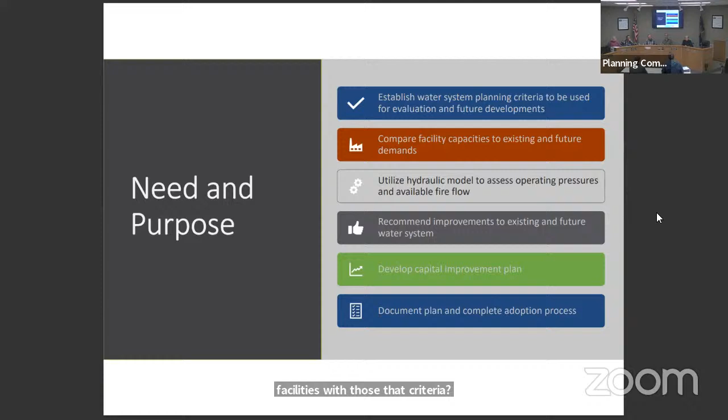Moving to the first slide. This is similar to the slide we had with the stormwater and wastewater master plans, but the need and purpose here is really looking at what the planning criteria are for the water system: how we want to evaluate it, comparing existing facilities with that criteria, and evaluating how it will look with future demands as the city and demands on the system grow.

We document all of that in the report you've seen. This slide shows population projections, and the growth is similar, if not the same, as the wastewater and stormwater master plans. That's intentional, so we're being consistent with where that growth is estimated to occur. With any good plan, that will adjust and change over time, but that's the snapshot in time.

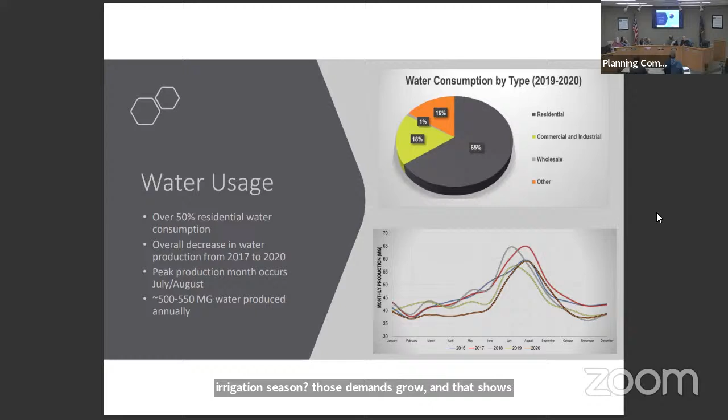This slide on water usage documents the types of users - wholesale, commercial, industrial, residential - those main user groups, and how much of the total volume of water delivered through the system each uses. The chart on the bottom shows demands throughout the year. It's typical for most systems that during summertime irrigation season demands grow, and that's shown for 5 different years, 2016 through 2020, and what those demands looked like for each month.

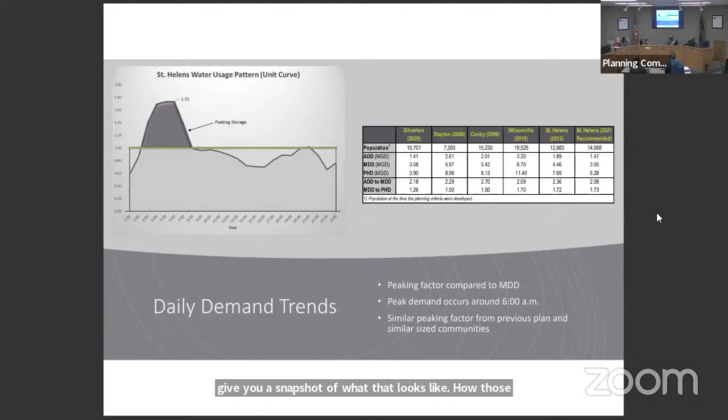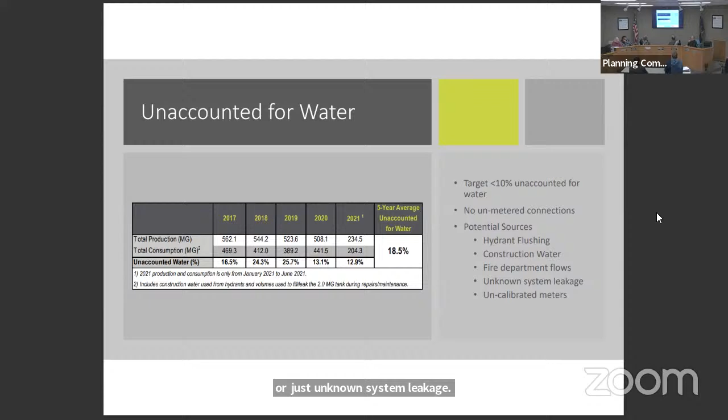I know city staff, engineering and operations staff have been replacing water meters throughout the system, so I feel confident they're heading in a good direction as far as mitigating unaccounted-for water.

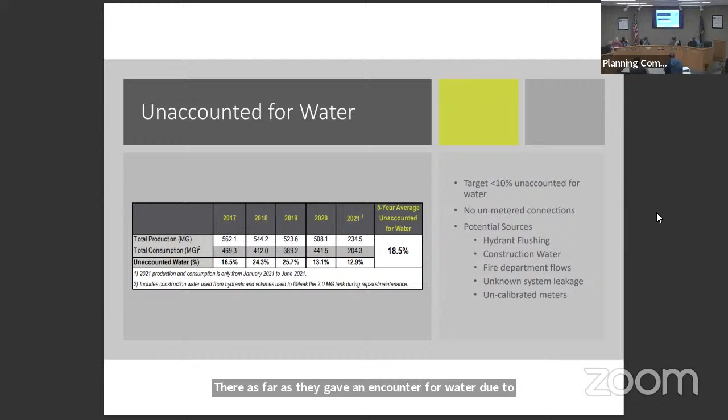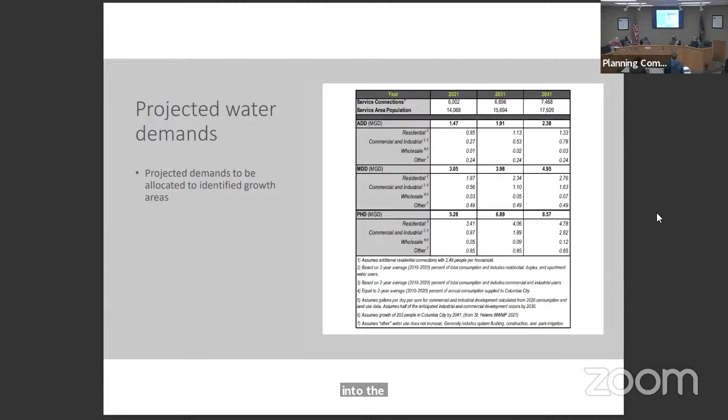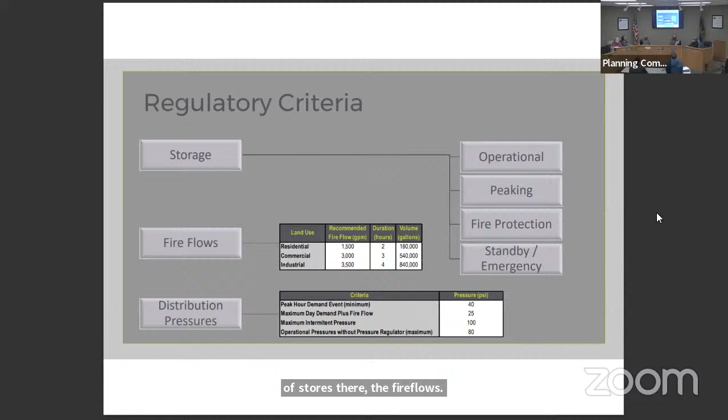Our regulatory criteria used to analyze and evaluate the system's storage shows the operational peaking, fire protection, and standby emergency storage that make up the total volume of storage recommended to be provided by the system. There are different nuances for each of the four types of storage. Fire flows are depicted for residential, commercial, and, as with most systems, industrial fire flow recommendation of 3,500 gallons per minute for 4 hours, which dictates the amount of fire protection storage you'd want to provide.

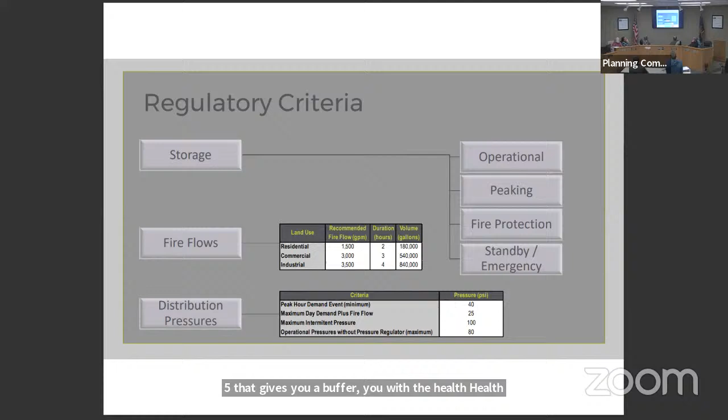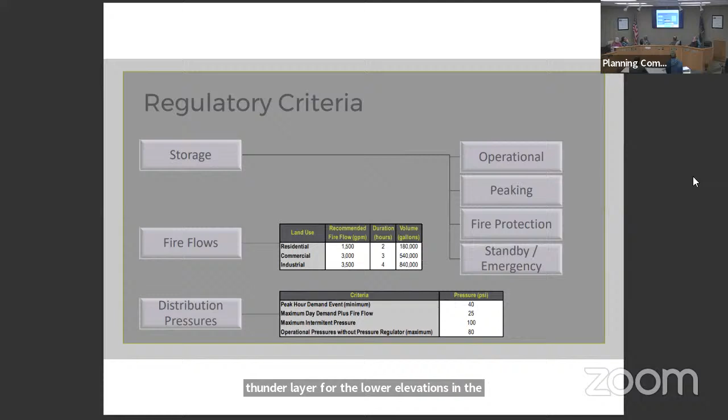We coordinate and collaborate on that with the fire department. Distribution pressures reflect the minimum - we don't want pressures lower than 40 psi, with fire flow not lower than 25, which gives you a buffer with the health code. Maximum pressures are 100 for intermittent pressures and 80 typical - and that's something I'll steal a little thunder on later. For the lower elevations in the city, there are normally higher pressures throughout the system.

So the water filtration facility, in looking at the existing conditions, it's as you'd expect with a newer facility. It's in good condition. What you're seeing is normal replacement of short-term assets. The filters need to be replaced on a regular schedule, and you're coming up on that time frame. City staff are planning for and looking at that replacement schedule, so they're doing what they should be doing. Overall, the filter facility is in good condition and meets future criteria and demands.

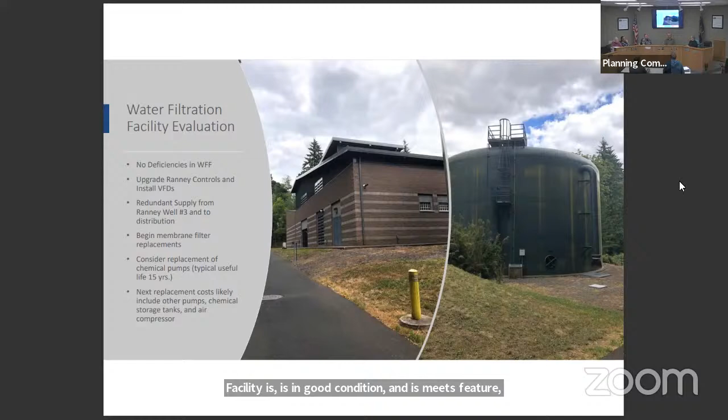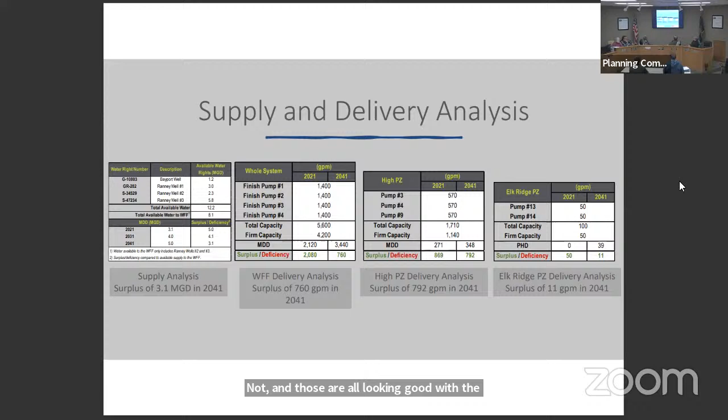Now that the criteria have been established for existing and future demands, we looked at what we call supply and delivery analysis. Supply looks at your available water rights compared to existing and future water demands. The table shows there's a surplus of about 3 million gallons per day. We also did the delivery analysis, which is the pumping capacity of each facility — system-wide at the filtration facility, and also the high pressure zone and the higher Elk Ridge pressure zone. Those all look good with existing and future demands. There's no deficit, no need to install bigger pumps, so that looks good.

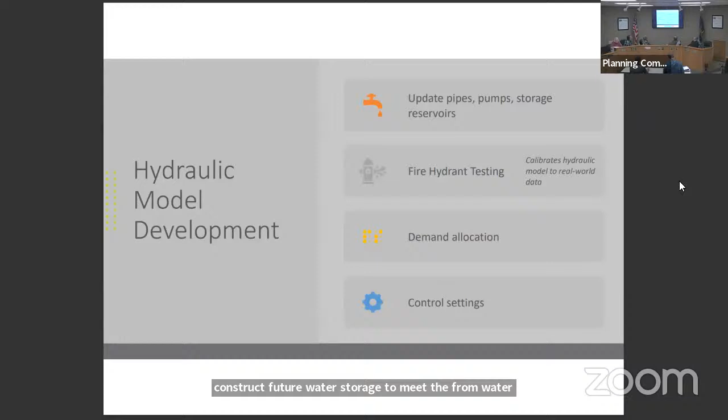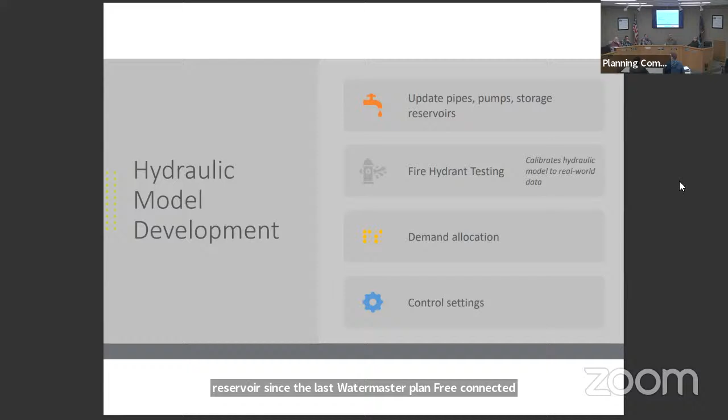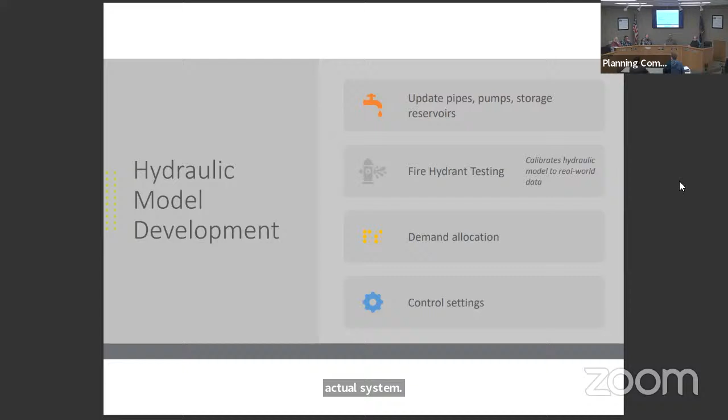As Peter mentioned, we developed a hydraulic model. This lets us look at pressures throughout the system and what each pumping facility is doing. Development of this model included updating all the pipes, pumps, and storage reservoirs since the last water master plan. We conducted fire hydrant testing in summer 2021, getting real data points from the actual water system that we input into the model, so we can compare and make sure the model produces results representative of the actual system. We allocated the water demands and assigned the reported control settings. Then we used the hydraulic model to look at different scenarios.

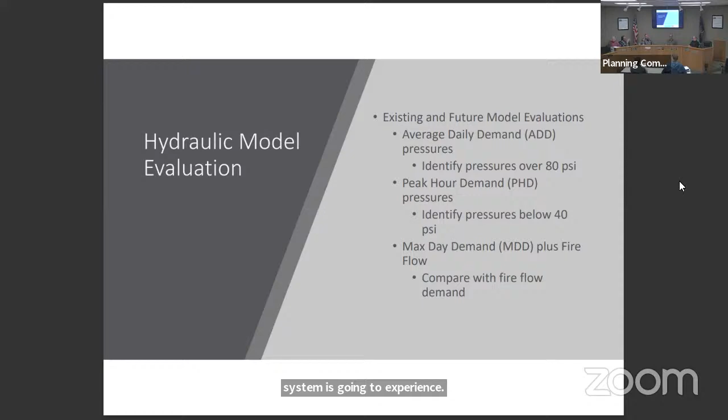Next slide. Looking at some model results, this is system-wide average day demand. The blue dots toward the river indicate pressures over 80 PSI, with a couple black dots over 100 PSI. Same thing on the west side of the city — in the high pressure zone, there's over 80 PSI.

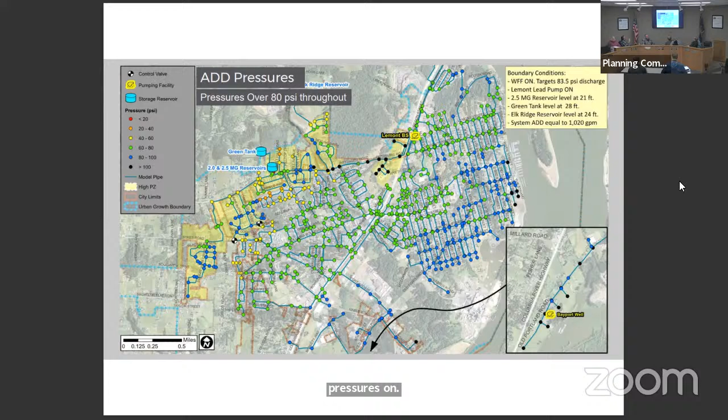Then we looked at peak hour demand. Next slide. Here we were looking for pressures below 40 PSI — not too many, a couple in the main pressure zone, and then up north above Pittsburgh Road. So we looked at improvement projects to correct these lower pressures, noted in the capital improvement plan.

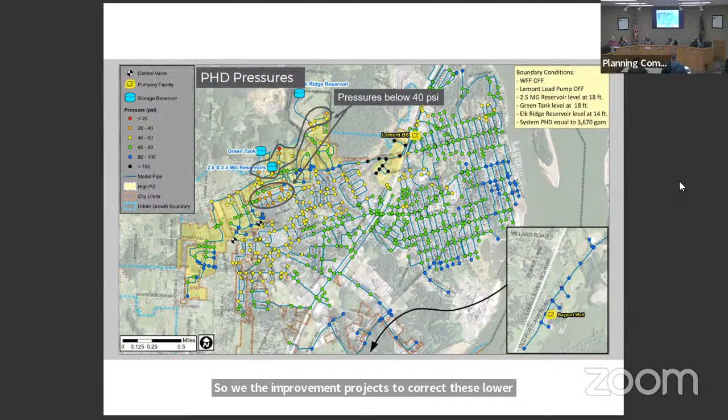This is existing water demands, maximum day plus fire flow. It's a busy figure, but green shows residentially zoned areas, red is commercial, and purple is industrial. The red dots show where fire flow demands are not being met, where improvements are needed to meet the fire flow established for residential, commercial, or industrial areas.

This is typical for municipal water systems. The max day demand plus fire flow is the demand scenario that is hardest to meet, because you have your max day demand and a fire flow which is quite significant for most systems—you're looking at 3,500 in the industrial area. So this is kind of your worst case scenario, as those fire flow demands dictate most improvements for systems. There are low pressure areas, but some of those also coincide typically with the lack of fire flow capacity.

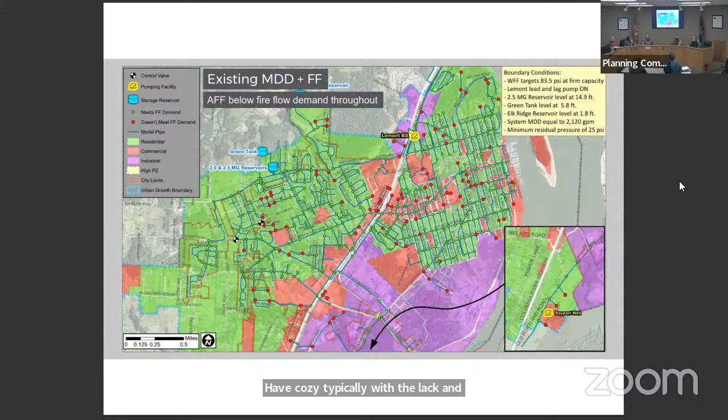This is looking at the future water demands, and we've put in pipelines where the anticipated growth is. This identifies where development needs existing system improvements in order to meet fire flow demand. The future pipes are shown in black, and the red dots are the same, not meeting fire flow. This indicates there are quite a few developments that would need improvements to the existing water system if they were to connect and meet the available fire flow requirements.

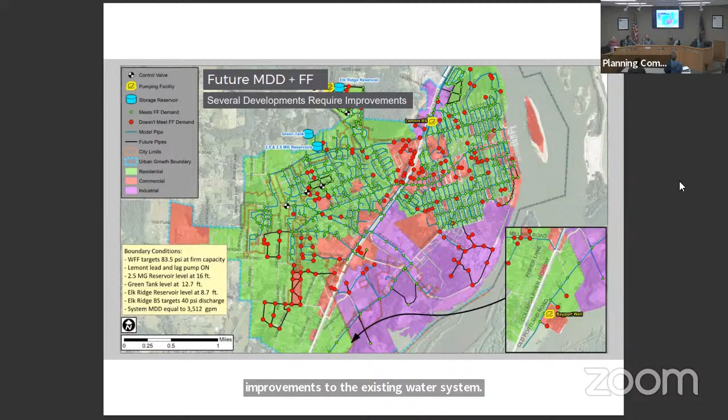Now that we've looked at pretty much all the components in the evaluation, we start looking at improvements to correct these deficiencies. We looked at alternatives for the bigger picture items. The only one we'll highlight here in the PowerPoint is the storage alternatives.

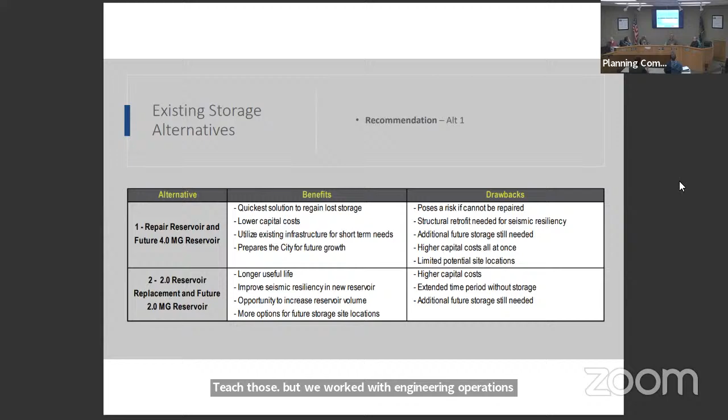This is looking to correct the existing storage deficit with the 2 million gallon reservoir offline. Alternative one would be to repair the existing reservoir and then install a future 4 million gallon reservoir to meet that future storage deficit. Alternative two would be to demolish and replace the existing 2 million gallon reservoir in place and then install a future smaller 2 million gallon reservoir. There are benefits and drawbacks to each. I won't walk through each of those, but we worked with engineering and operations and came up with the recommendation of alternative one for correcting the storage deficit.

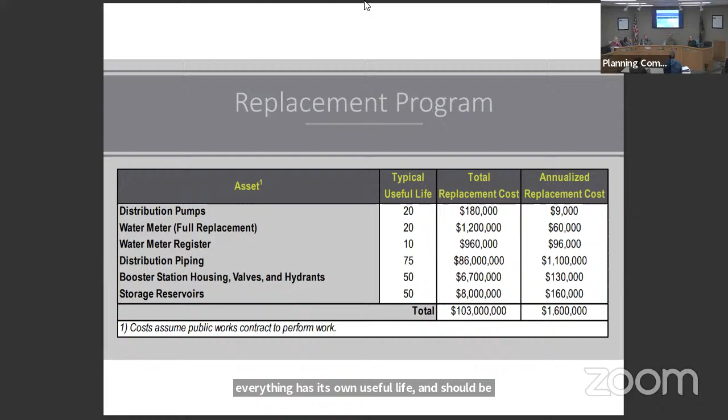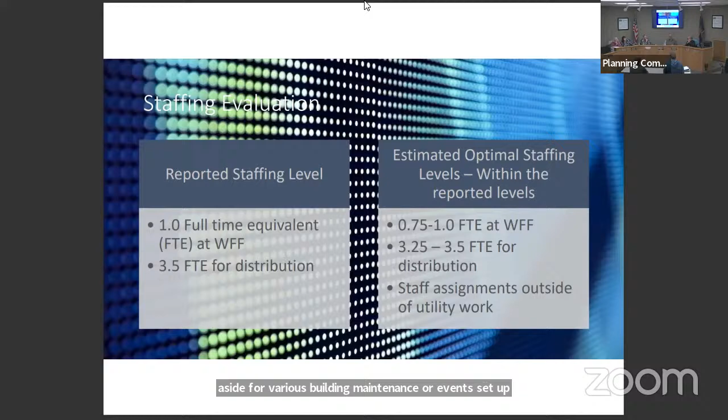The capital improvement plan is a summary of all the recommended projects and solutions to address the deficiencies. We have priority 1, 2, and 3, which include the capital improvement plans for that 20-year time frame. We've also broken out priority 4 for this master plan, which covers projects that are developer driven. They're in an area that doesn't serve any existing customers, and will only be needed if there's new development.

That could happen anytime, right? If you have the crystal ball for when the property owners or whoever is going to develop... that's why we don't put that into a priority 1, 2, or 3 specific time frame.

Priority 5 is the 20 to 50 year plan. It's planned for a 20-year planning time frame, but Oregon Health Authority's drinking water program now requires, as in other states, a seismic resiliency plan. That was a component of the evaluation and report you saw in the full report. Those look out past 20 years, all the way to 50. There are portions and recommendations associated with the backbone system that we'd recommend designating as the backbone system, and then planning improvements so it can be resilient to a seismic event. So priority 5 covers those items not already covered in priority 1, 2, or 3.

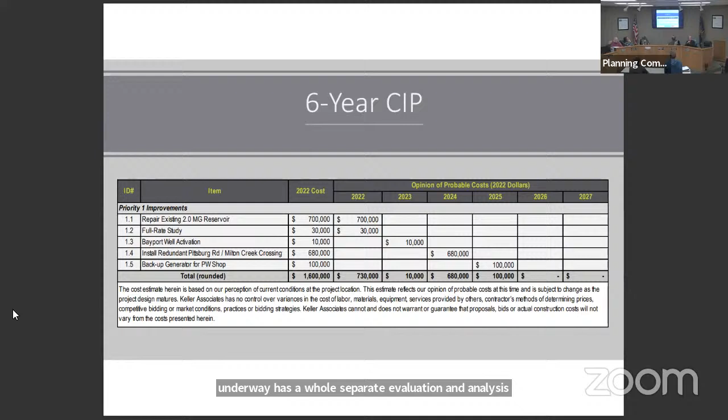Next, for the 6-year capital improvement plan, they asked us to look at those priority 1 improvements and allocate them by year. You'll notice the repair of the existing 2 million gallon reservoir is a project already underway, with a whole separate evaluation and analysis that the engineering and public works group is looking at. That wasn't part of our specific scope, but we wanted to make sure it's in the capital improvement plan so it's properly allocated and budgeted for.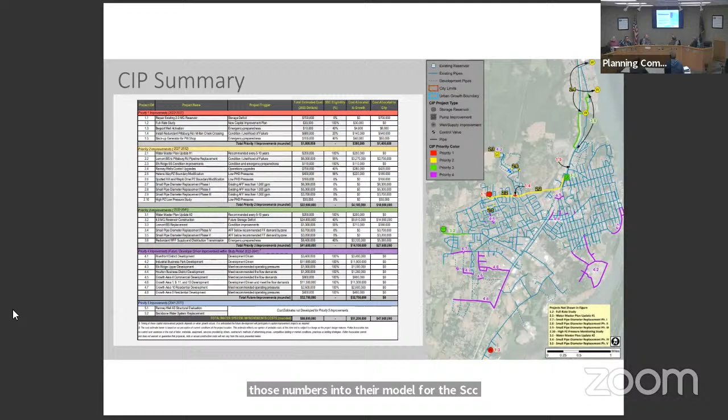The other component, besides the seismic resiliency plan, that was incorporated and recommended, is the water management and conservation plan that the Oregon Water Resources Department requires of water systems. Because a lot of components intermingle, it's much more efficient and can be done quickly and simply with a small amount of extra work to complete the water management and conservation plan.

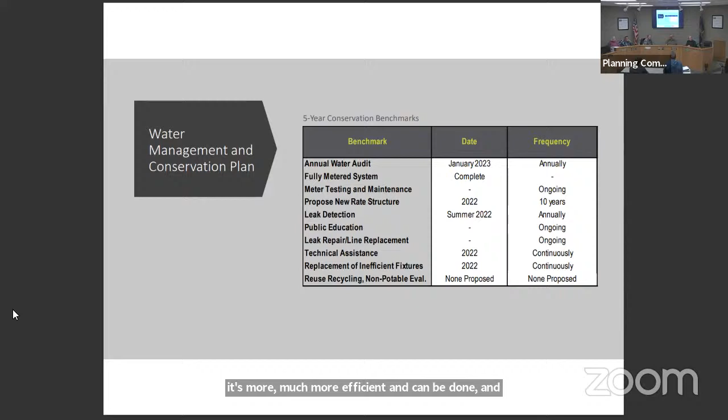One of the larger components of the water management and conservation plan is updating the water curtailment plan - in the event of a water shortage, what is the trigger, and what are the different stages? This is mostly based on the previous water management conservation plan, except we broke it into four stages: mild, moderate, critical, and emergency. We'll go through each of those. The first stage is mild - this is if a water shortage may exist, and the goal would be to reduce water usage by 5%.

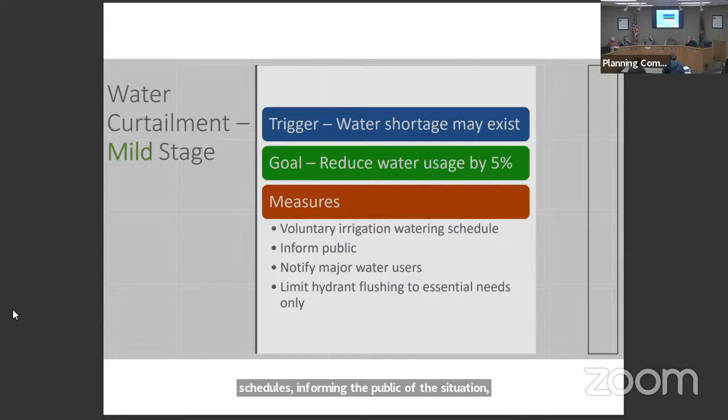And this would be done by voluntary irrigation watering schedules, informing the public of the situation, notifying the major water users, and also limiting hydrant flushing activities. The next stage would be moderate.

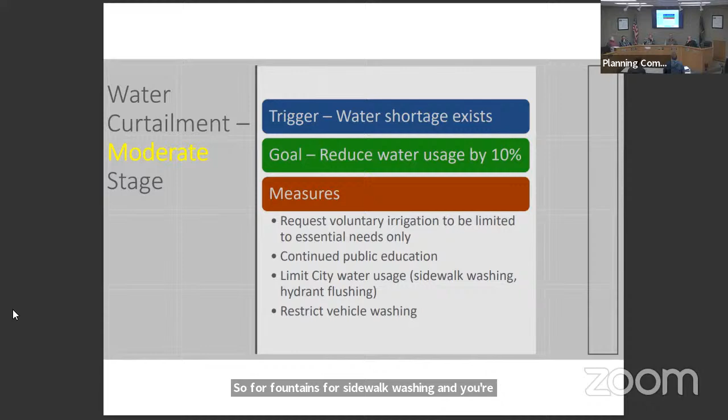The trigger is that a water shortage does exist. The goal would be to reduce by 10%, done by continuing irrigation schedules, continuing to inform the public, limiting city water usage for fountains, sidewalk washing, hydrant flushing, and also restricting vehicle washing. Next stage is critical.

This is when there's a threat to the water supply that may reduce the amount of water that can be supplied to the city. The goal would be to reduce by 25%. It's done by limiting swimming pools, hydrant flushing for emergency only, and also restricting park irrigation.

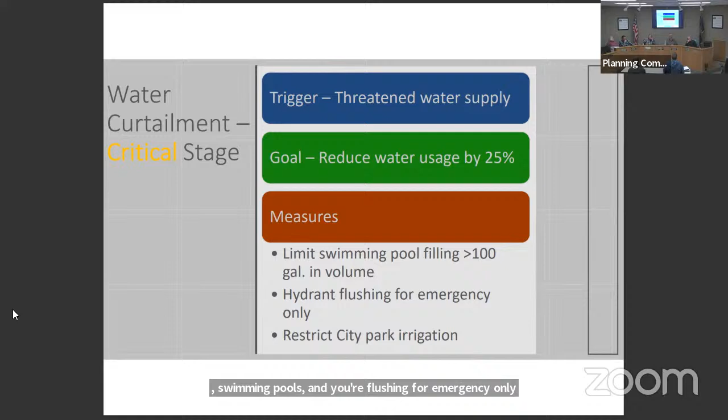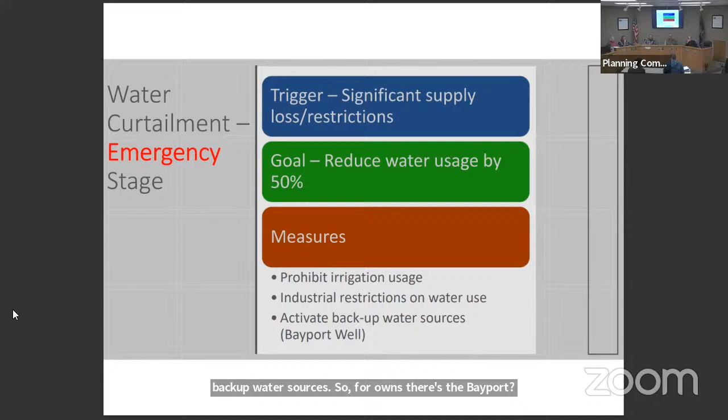And the last stage would be emergency. This is when there's significant supply loss and we can't meet the water demand. The target would be to reduce water usage by 50%. This is done by prohibiting irrigation, notifying industrial users and restricting water usage, and also activating any backup water sources. So for instance, there's the Bayport well, which isn't used day to day, but could be activated as an emergency supplemental water source.

And that brings us to the end of our presentation. So we'll open it up for any questions or comments.

The Bayport well only runs in an emergency situation? That's the way it's operated. It has odor issues, so it's shut down now, but we can use it in an emergency. We have to issue a boil water notice if, or when, it's been put on.

Yeah, there's a lot of complaints about it. Does the city's water come from the Columbia? All of it, yeah, all of it. The Bayport well - all of the city's current water comes from the Ranney collector wells.

Morton had said at a council meeting that the city had rights to something in the strip property. Oh, there is - we talked about this, this actually came up during the city council presentation as well. There is a water right there, but it's not used for the potable water system for the city.

Okay, so I'm just curious about whether that's a viable alternative to look at for potential increased supply or potential emergency use. I don't know what the budget would be on that, but if we have the ability of getting that kind of volume, if needed, yes, it is a possibility. It would take a significant investment in infrastructure to get to that point.

I noticed on the graph that was one of the low pressure areas. So number one, we have enough water, we can build 400 units, condos and things like that there, and we're going to be able to have fire capacity in that area too. So that area has a high pressure area of that main zone. That's growth area 2 from the first couple slides, so it is accounted for in the master plan. The capital improvement plan does account for that allocated demand, that near future demand, hopefully.

So enough water pressure and enough water for condo developments. I think there's a 55-foot limit, we could build 5-story condos or whatever, and there's going to be enough water pressure and water fire suppression capability. There is in the capital improvement plan, with that development, a development-driven improvement to the existing system. I think you saw some of the red dots - yes, there's a couple existing pipes that need to be upsized in order to meet the fire flow demand. That's project 4.1 in the capital improvement plan, the Riverfront district development, so it's all the improvements needed specifically for that.

I had a couple other questions. So the Sykes, what was the idea? Why would we need the Sykes road? I guess you guys are leaning toward the Sykes road as an area for the storage.

So what we did, we looked at not just those 4 locations. It's kind of a cool analysis - Trenton's a whiz at GIS, and being able to look at that contour band, it needs to match what those existing reservoirs are at to be able to operate at the same system pressures and have good operation. There are other areas throughout town that have that, but when you're looking at a 4 million gallon reservoir, it doesn't fit - whether it's too close to a creek, river, there's lots of components we're looking at. Also developable - is it flat enough? Is it on a big hillside where we'd have to move a mountain in order to build it? So that one off of Sykes Road was the best solution we could see. The recommendation is when you first start to actually implement that reservoir project, you're going to do a much more detailed siting evaluation, looking at environmental components, property acquisition, drainage, overflow - a whole list of components we'd look at in a lot more detail. But from our master plan level, that looks to be the best location.

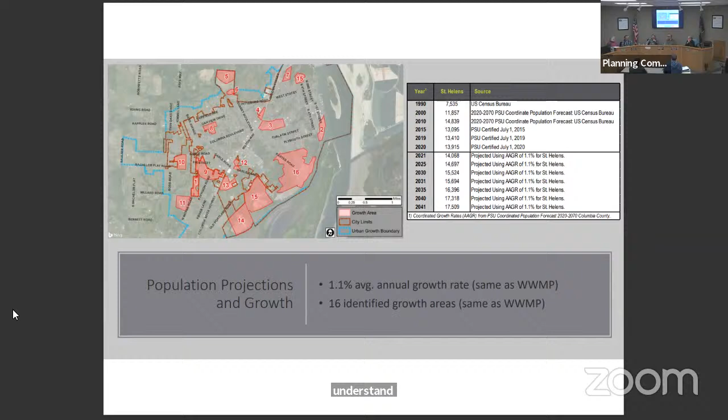Lots of questions? Thank you. Other questions? All right, thank you, appreciate your time.

It's now 7:51 p.m. The public hearing is now open. The quasi-judicial land use hearing - the subject of this hearing is a request for a variance. Subject property is identified on the county assessor's map as lot 1200 on map 1W4DA. The applicant is Nasia Vanilla. The owner is City of St. Helens. Because quasi-judicial proceedings require the observance of certain procedural formalities, we will take a few minutes to cover some preliminary matters required to be addressed. Any member of the commission wish to declare an ex parte conflict of interest or bias in this matter?

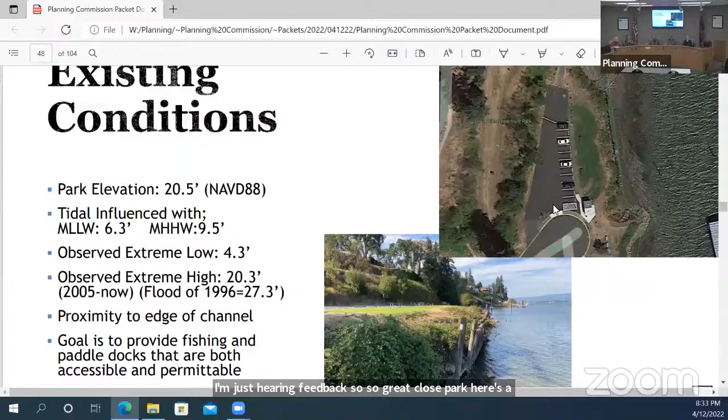So Gray Cliffs Park, here's a good aerial of the park itself. I wanted to point out a couple things. In 2019, we got an Oregon Parks and Rec grant to install this beautiful new restroom facility where my cursor is, and then we also paved and striped the parking lot.

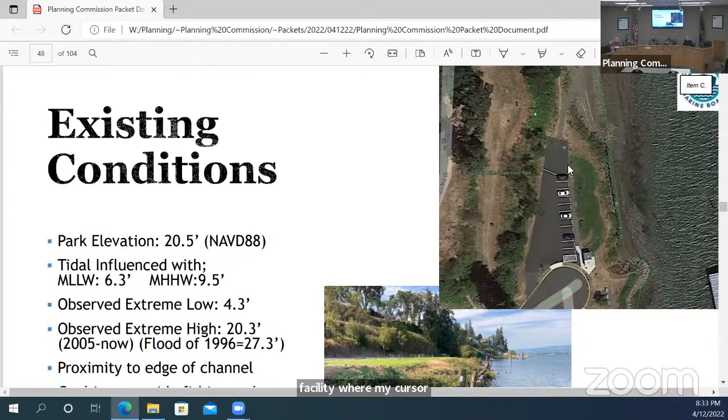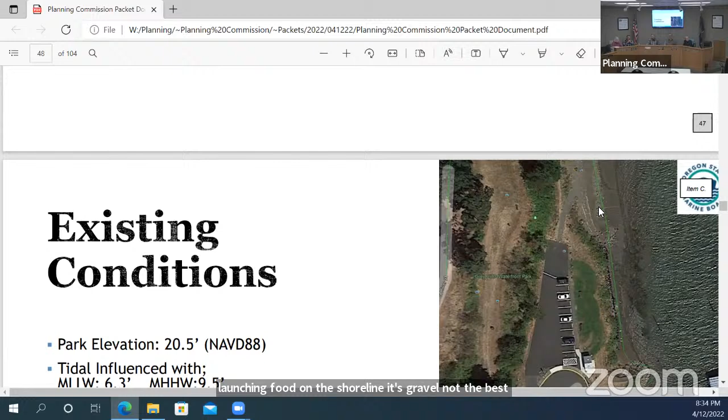This area here is a loading zone for bringing paddlecraft, launching on the shoreline. It's gravel, not the best way to launch, but some people do prefer it. Maybe one day it'll be sand. Maybe. Then you've been working on that for a while.

And here's kind of a shot looking up this bank here of the park. So a couple other things on here. The Marine Board did a survey and put a couple numbers up here. I just want to point out two of them.

MLLW is mean lower low water, that's at 6.3 feet in elevation. And then the other one is this extreme high, abnormally high, at 20.3, and then the flood of '96 was 27.3. So you can see the range of elevation that the river has, that this in-water facility has to work with. It's a pretty big range. So that'll impact the slope of the ramp, ADA accessibility—all the things that impacts quite a bit. So just keep that in mind.

And then here, it's just the goal—we talked about this—is to have a paddle dock, launch, and fishing pier that are both accessible and permittable. So that's the kind of goal of this project.

So I threw this in to show the proximity to the marina. Here's the parking lot in yellow. The area we're going to look for this facility is right where I'm drawing this circle. So you can kind of see the extent. It's not as far out as the marina, but it is pretty far out into the water, the facility we're looking at. And that's driven primarily due to permitting.

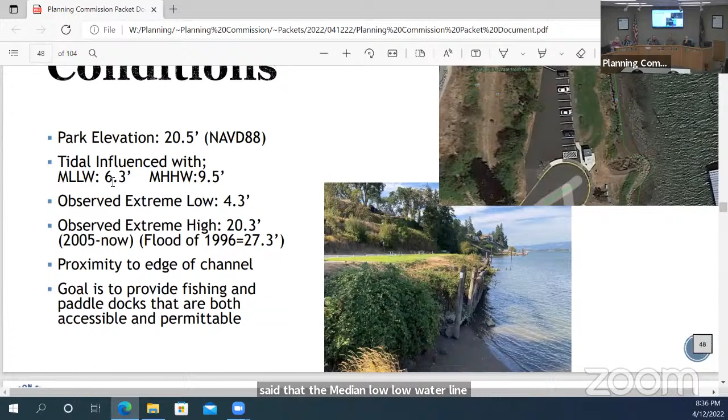The Marine Board said that the mean lower low water line, this number, they want to be 20 feet out further from that line of elevation to permit the facility. So you'll see that on the drawings. But yeah, it's all within here. They want at least 20 feet.

Where the facility would be, not necessarily horizontal distance extent, but depth. Yeah, you're right. That has to do with the National Marine Fisheries Service concern about shallow water habitat for the inshore fish—protecting that shallow water habitat.

So this slide—man, there's a lot of permits to get, and a lot of consultation with a lot of agencies for in-water facilities. This is basically the full Monty of permitting. And this is actually why they have a technical assistance program, because they do these facilities across the state. They know all the right people, they're the experts on this stuff.

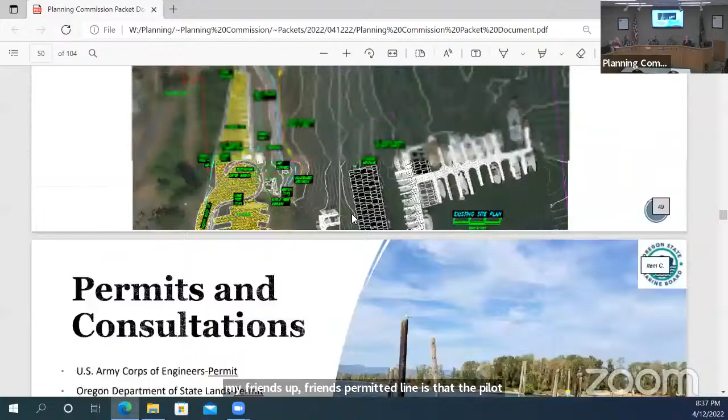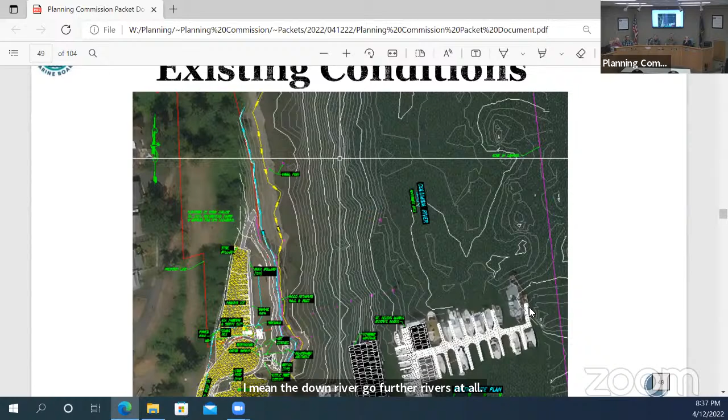Where's Brad's permitted line? Is that the piling or does he go beyond that? So these are the pilings, these pink dots. He's way beyond—you see the pink? No, but I mean downriver. Does he go further downriver at all with his lease? Oh, I'm not sure, I don't know what his lease is. He was talking about putting more docks in down there at one point in time, so I don't know. Do you mean does his lease extend in front of the park here?

Correct. No, we actually maintain a commercial moorage in this area with DSL now. Is that right? Yeah, okay. Not you, but other department. Yes.

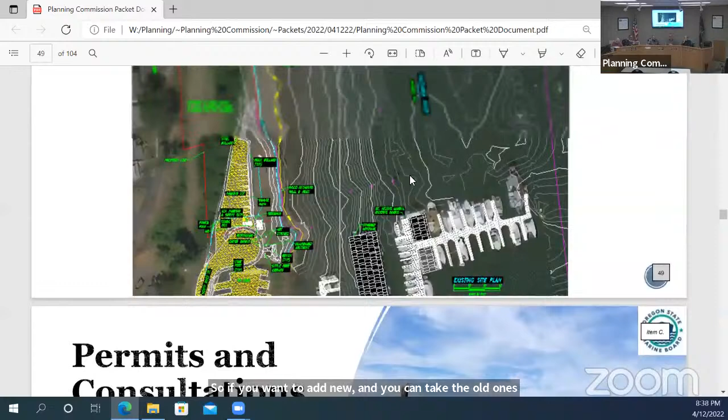I think John Walsh was thoughtful about not removing these pilings because you can use them as permittable mitigation—if you want to add new ones, you can take the old ones out and place the new ones easier. So these are actually really valuable pieces of mitigation for permitting. Likely would be pulled as a result of this project for mitigation.

And you'll see on the three concepts that are in here, some of them are pretty close to some of the designs, so we would have a priority to remove the ones that might impede the route of travel. Maybe some that are in the water most of the time that would be important to get up. But you can still use those as mitigation. You're counting on that, right? Jenny, if we're going to remove some of those pilings...

I just got that it's actually bird habitat. I've seen ospreys nesting on top of the pilings. Pretty sure these agencies would know that, that's the reason why they want to take them out, because they're predatory for endangered species. Yeah, so that's the one. They're beautiful to watch, anyway. So it's ecosystem versus what? A terrestrial person—it just provided more space for predators to pick off the things that can barely survive. Especially cormorants. Osprey aren't endangered. No, they are not.

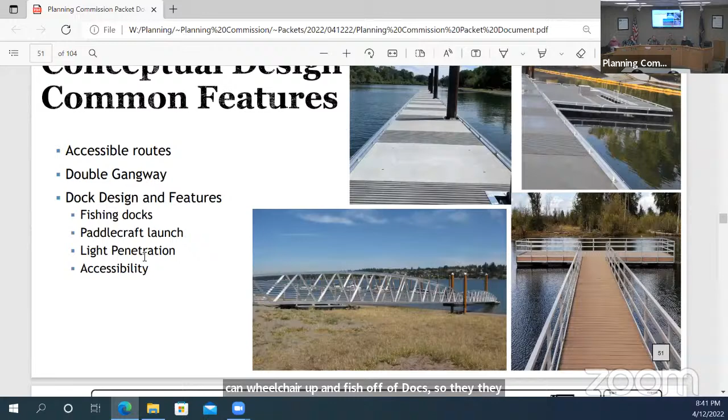There's fishing docks - this is an example of a fishing dock. We would lower the railing in some areas so you can wheelchair up and fish off of docks. They make ADA accessible railing for fishing off of. Another common feature is light penetration, so you notice the grating every so often that allows light to reach the water. This is for permitting purposes as well, and it's what Dan talked about. You've got endangered salmon, you don't want to create so much dark shadow that there's areas for predators to take out the salmon. Light penetrating decking is important for permitting purposes.

So I was hacked a little bit because I'm picking it apart a little bit. I was in a pre-application meeting with an improvement at the Sykes Bay Marina just last week, and we want to do a double 12-foot wide gangway down for access to paddlecraft, to be able to pass each other and so forth. Do you know how wide this gangway is? Well, I know it's at least 10 in the actual dock itself, but the gangway down I thought was 5. National Marine Fisheries Service had a real problem with that. Oh interesting, that it was 5, not 12?

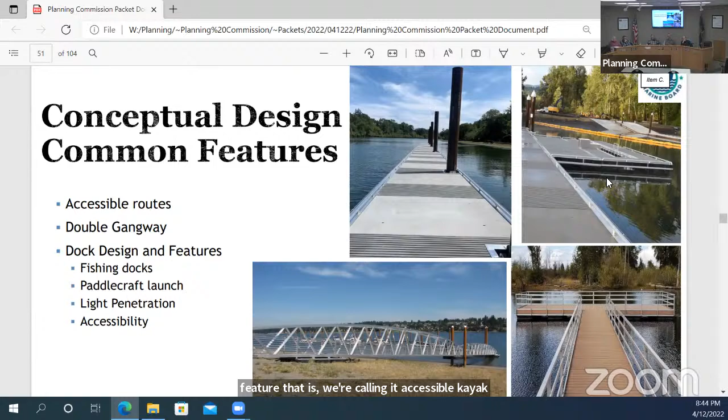Yeah, I'm sorry. So I just want to keep this picture in mind in the upper right - it's not the best picture of it, but there's a later picture. This is what the actual kayak launch looks like. I know you can't really see it very well, but this is the feature we're calling the accessible kayak launch ramp. There's a better photo I'll show you. The point of this image is not the upper area - there's better images that show that. The point of this is the side profile, showing the double gangway feature. The first portion is stationary, and then the second portion goes up and down with the elevation of the river. This virtually flat one would be when the river is at its highest, with virtually no slope to get to the dock facility.

When it's at its lowest in the summer, you're going to have a slope down to get to the facility and then the ground. Interesting thing about these, they're stationary most of the time, but for extreme flood events, they also float up. They did say the top of these is 6 feet higher than the flood of '96, so they wouldn't just float right off the top.

That was a question brought up in the stakeholder meeting. Well, during the '96 flood, they had to have tugboats go catch them as they floated over.

What else I wanted to point out on the side profile is that you can actually cut through. If you're launching out here and want to go around, you can swim underneath this secondary portion, so you don't have to go out into the channel area, the river portion. You can stay closer inland and get around by swimming and pushing your kayak under. I just wanted to point that out.

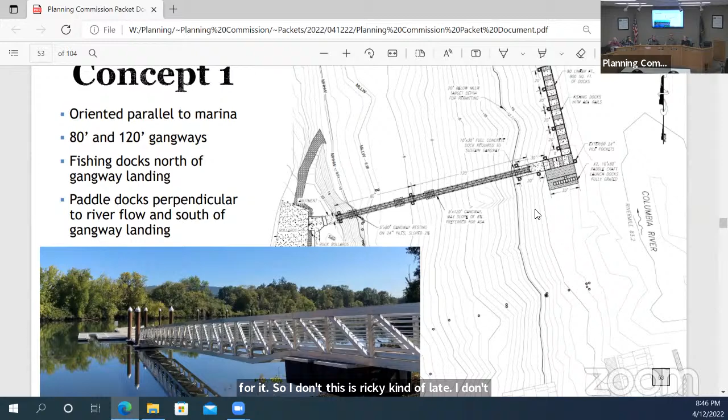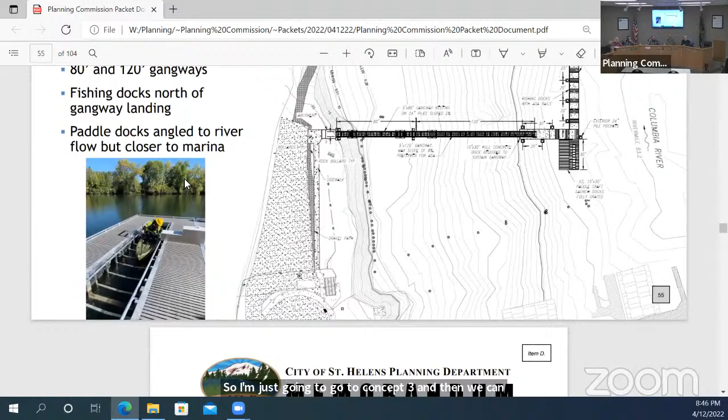Since we're already kind of late, I don't want to go through each one of these and critique every component. I just want to talk about the preferred alternative and why we ended up there. So I'm going to go to concept 3, and we can refer back to the others if we need to. This also has the best photo of the actual ramp facility itself.

You can see these bars that are submerged in water so you can ramp up onto them when entering or exiting the river. And then this metal thing slides out so you can roll up in your wheelchair and transition into the kayak a little more easily, because these slide in and out.

This facility is in Westport, Oregon. The Marine Board designed that facility, and it's been installed - you can actually go visit it. They just did a brand new boat dock, a whole big project in Westport. This was just one component of it, but the Marine Board's first test of this design was there, and it's working really well. So they want to implement another one here.

So let's talk about the concept. Here's the edge of the parking lot. The dock itself will come off in the loading zone area. This is currently the gravel area where shoreline launchers could still launch. This will not replace the shoreline launching, so if there's a preference, you can still launch there.

The first gangway is 80 feet long in this concept, and the second one is 120 feet long. So total you're at 200 feet in length, which is pretty long to carry your kayak. It's a trek, and that was talked about at the Parks and Rec Commission - what if we just shorten the ramp? Well, the shorter it is, the higher the slope. With this length, we can achieve an under 8% slope, which is a really good, achievable ADA accessible slope.

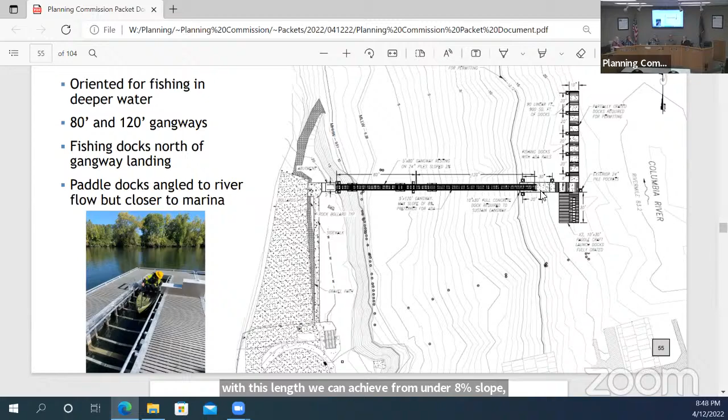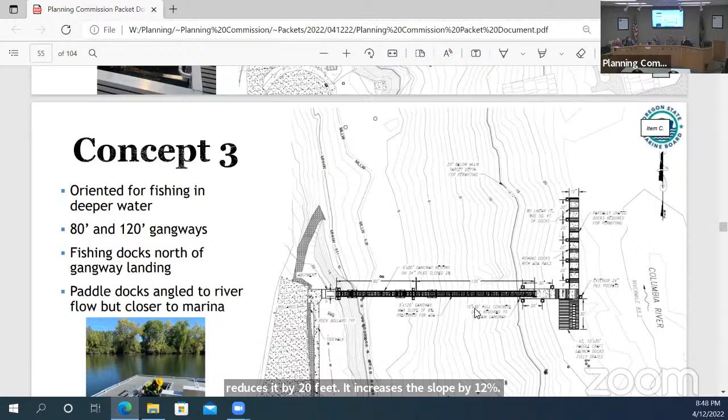The shorter you make it - one of these concepts has it at 100 feet total, reducing it by 20 feet - increases the slope to 12%, which is substantial. So I think the overall preference is to have the longer double gangway so the slope is less. That's the first component. But 12% still meets ADA for these types of facilities. The Marine Board has said they're trying to exceed ADA requirements because that slope is so steep, even just for families to get down while wheeling or hauling kayaks.

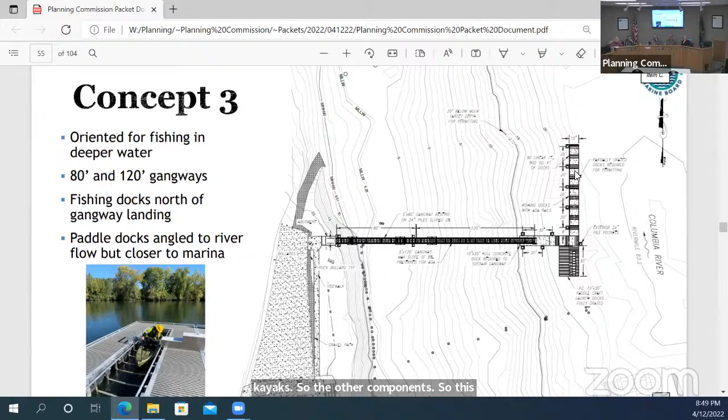So the other components - this is the fishing side, let me zoom in a bit. It has the pillars on the shore side of the launch, so you'd walk out here and fish off the side. Some of these concepts had the fishing side on the south side, and that was not the preference, just because of the way the water flows. You'd want your lines going northward, and you don't want them to conflict with the kayakers. So that's the fishing component.

And then this is the orientation of the ramp. This is what we spent a lot of the stakeholder meeting talking about - how we actually orient the ramp in relation to water flow and wind. And ultimately, this was the preference.

There was a tweak we made during that meeting, which is to flip this transition dock with the actual ramp. So this ramp would move here and the transition zone would move to the outside, which would help provide some wind break and current break when you're getting in and out of that ramp facility.

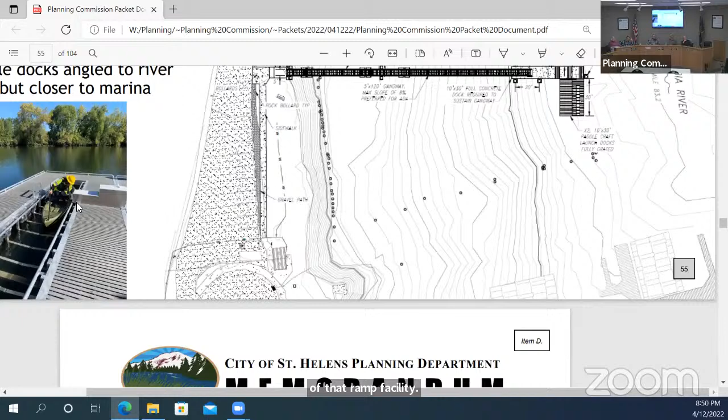This ramp is actually long enough to fit two kayaks, so if you have a family, you can have two people getting in and out at the same time. That was something the committee talked about and appreciated.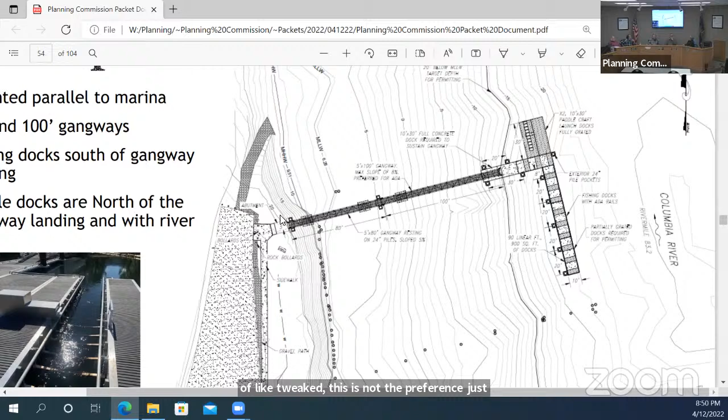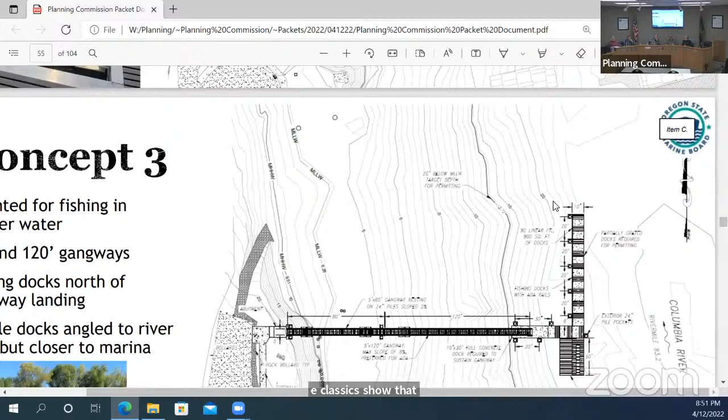We're considering angling it farther upstream, though none of the concepts show that. So going down to the preferred one, the fishing pier would be even a little more at an angle, this direction. So bringing this facility down just a little bit more - the point being, as the wind blows, like it does every summer, upstream you get that break from the dock.

When you're coming in from Sand Island, you get wind break for the kayak, because the wind is going to be much more effective than the current. At least where there is a current, it's lined up with the ramp to put your kayak in, so you're not fighting the wind, but you're lined up.

Well, I'll try to get into some of it. The other thing I was concerned about was initially having the paddle dock on this side, with people expecting to get out on the beach side. But I didn't factor in the wind initially. So now they're anticipating that if you want to go to the beach launch, you go under this ramp and out.

So you're not interfering with the fishermen - there's no conflict because you're going under the ramp and heading towards Sand Island or wherever you want to go.

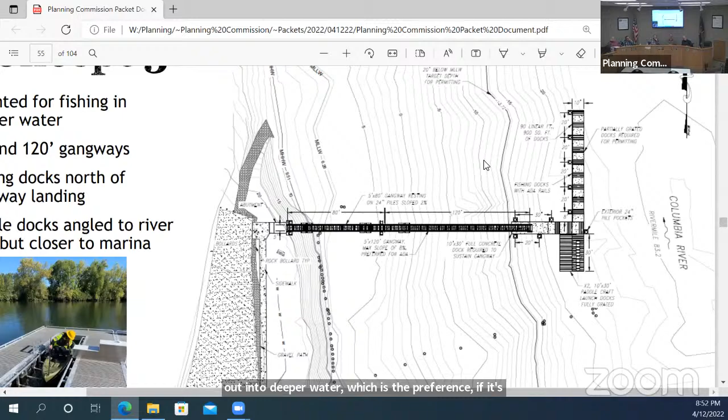There was talk too about how this orientation for fishing gets you out into deeper water, which is the preference. Right, if it's turned a little bit more, it'd be better. And then this just shows another picture of that ramp from the other side, so you can see the arm bars to help you get in and out.

But that's what I had. It's kind of a lot to take in, so I get that. If you have comments later, just let me know - we're still getting feedback up until May.

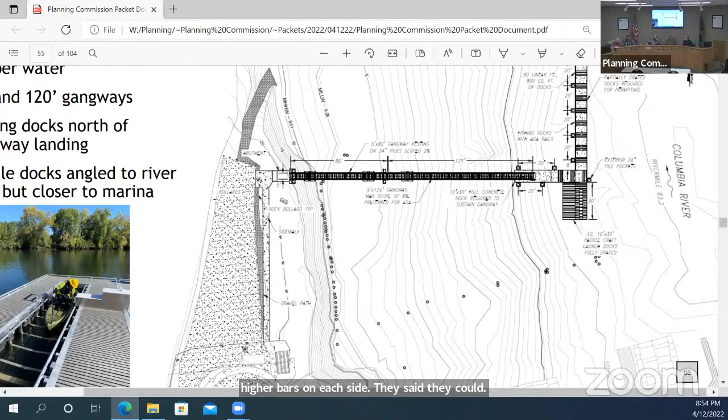I can see that getting very busy. You might want to put some rails on the other side of the dock too, so if someone just wanted to throw it in the water and get in, then there's backlog because you've got two getting their gear together - it takes time to get your kid in, put your dog in. It's a very low dock already, so a lot of people are going to launch off the side.

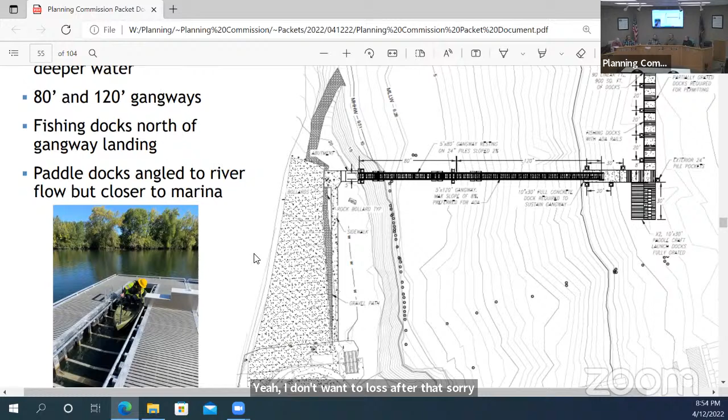Yeah, I don't have to launch after that, I can launch off the side, because I've been at Scappoose where you launch off the regular dock and I'm just walking on the dock. Well, that's what this prevents. Yeah, it's much easier.

We talked a lot about how it might be difficult to get your nose into this ramp, and Brad asked if you could do a Y shape at the entrance so it's a little wider. I think you've got so much control with the wind and current - especially in summertime, you can go in with the wind, into the wind, which is coming from the north.

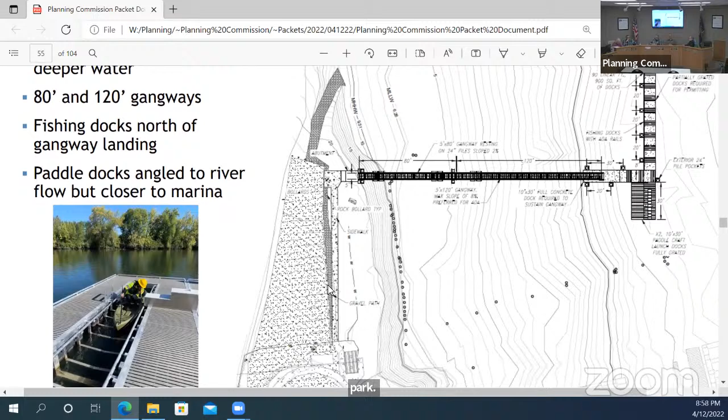Steve, I think I was thinking more about your question about scale. And I think about the paddling center and how big that parking lot is, how big a facility it is, and then I think about our 10 parking space lot. I think this is the right scale for this park. I like that Dan is thinking ahead, maybe you could add on to it in the future, maybe if we provided more parking. These in-water facilities are costly for sure.

So it's a good question. I like that you're thinking ahead.

Well, I sat in on the parks meeting too, and there was some discussion about extra parking. I had some discussions with people in the public about the potential for this ramp. People are very interested in it. There were questions about whether there'll be kayak rentals, kayak storage. This has the potential of being quite busy, so is 30 feet enough? If you're trying to get 3 or 4 fourteen-foot kayaks in, is that going to be big enough, is it going to facilitate the need, so we don't run into backup queues in 2 years.

Yeah, the city has no plans to start running rentals out of the public park, but I could see it building more kayakers in the city for sure. If you add more facilities, more people are going to go out and buy kayaks to use it, right. That's how it works, yeah.

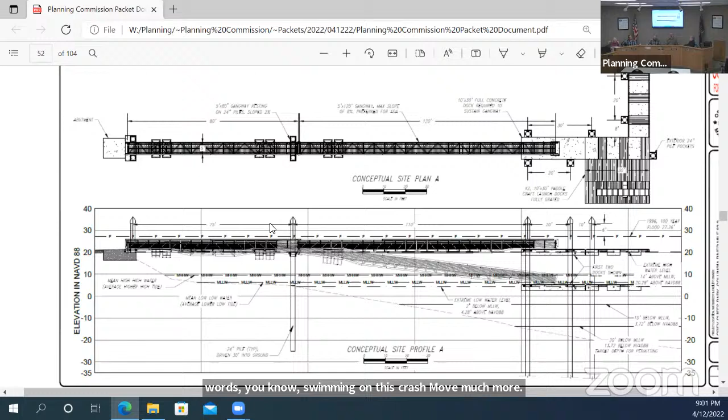Yeah, I agree, it's a bigger problem because it's so long. The Parks and Rec echoed that too, saying that's a long ramp to walk. And I said, but there's a loading zone in the parking lot, at least you have that.

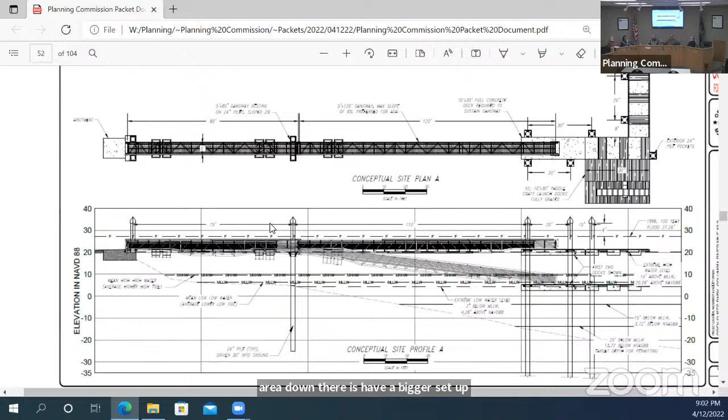One thing Scappoose Bay is gonna do, or could potentially do, is make a little deck, a wider loading zone, a preparing zone, so you get your kayak stuff together before you go down. That way you're not plugging up the water access getting your kayak loaded with gear. So you might think about an alternative bigger area down there, a wider get-ready area. Fortunately in the park there's a grassy area where people picnic currently, all along here too. We don't have the parking and turning problem they have there, we have enough space, but maybe set it up like a staging area.

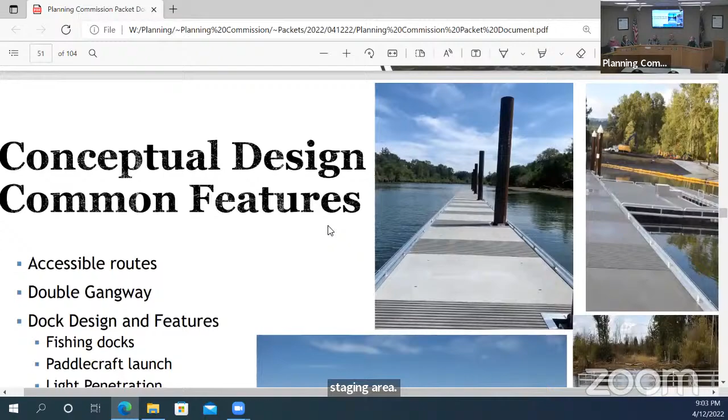That's good feedback, just something to think about. We don't have any problem with it. I don't know if a passing lane is even a permittable thing, since they got shot down trying to make a wider ramp, but it doesn't hurt to ask.

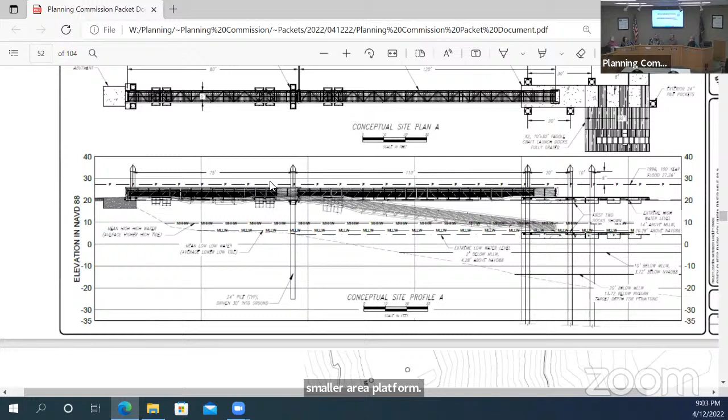This one's only 5 feet wide and they were trying to do a 12-foot wide ramp. So maybe just a smaller platform area. Also, when drafting it, before it goes into permit, if you could show an additional kayak launch dotted in there, then once it's already passed, down the road you could always put it in without permitting all over again.

As a side note on permitting issues, National Fisheries Service was not super happy about the fishing dock. It was very similar to this, wasn't a fishing dock, it was their launching dock. There's a little nuance here: we have this chunk of concrete, and they have the mesh, which is more see-through.

They would like to see 50% of the dock be 60% light penetration, but they had 50% of the dock at 50% light penetration. They found that if they made the grating bigger, these things are modular and get put together on site, that they flip over. It's an engineering issue, they make the grating as big as they can with the concrete, so you get heavy concrete on one side and light mesh grating on the other. If it's too much grating, it can flip over when they're putting it together, which is terrifying.

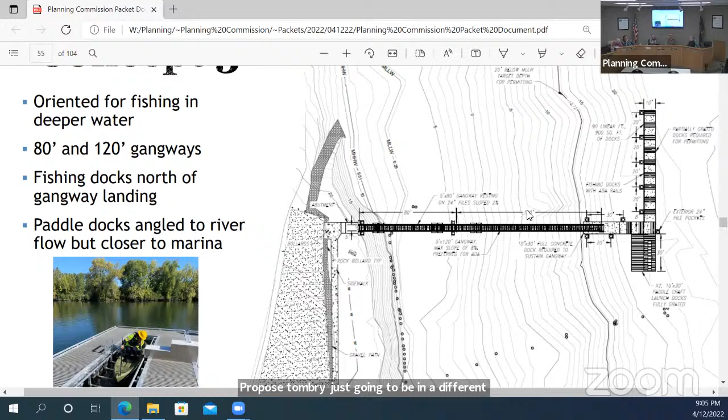And they're our partner in that, so we kind of have to work within their parameters. It's not us permitting it. Exactly. And actually, they may even hire a consultant to do the permitting on their behalf. The Marine Board may not even have the staff or expertise on hand to do that type of permitting. And at that particular meeting, a consultant was presented.

But it's 9:06. Is there any more feedback on this concept? I definitely jotted down a few ideas.

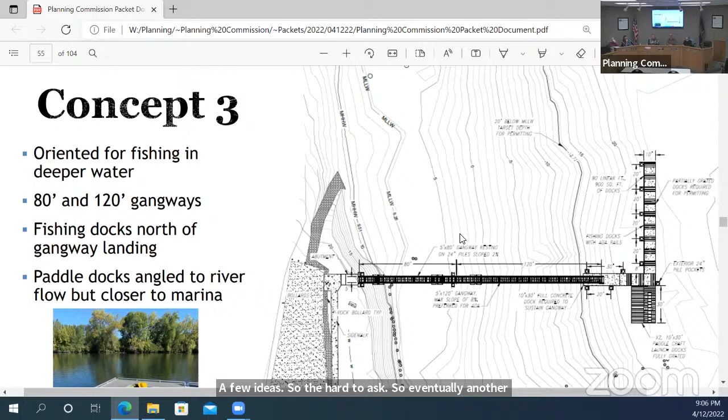Doesn't hurt to ask. So potentially another one of these just on the other side, and everything's shifted over. And then maybe a wider area for passing, if possible, or even a wider ramp in general. So instead of 5, maybe 6. That ups the price. Oh, I'm sure. We keep it to a passing spot compared to passable.

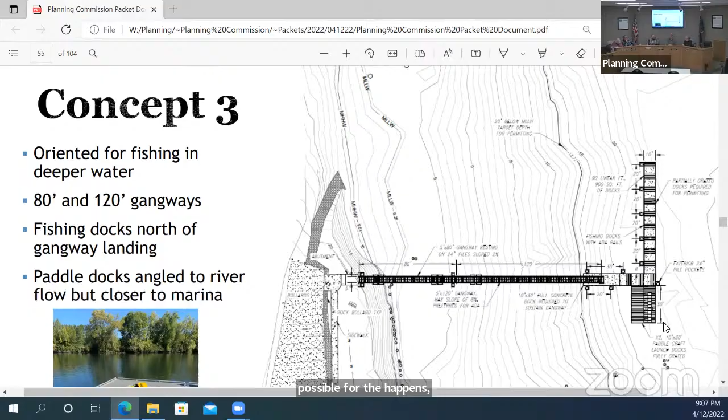Great. And that was the thing about, seems like we talked about this in our little committee, that people are going to go out to this dock just to walk out there to see things. Oh yeah.

Didn't we talk about having a wide spot out there? We did, yeah. That was where it was, it wasn't the Scappoose, it was the Marine Board, with us, and they thought that was not a bad deal for many people. Yeah, exactly. They're like, that's a great idea for design, but we'll see. That's right. No, this is good. Getting me fixed up, okay.